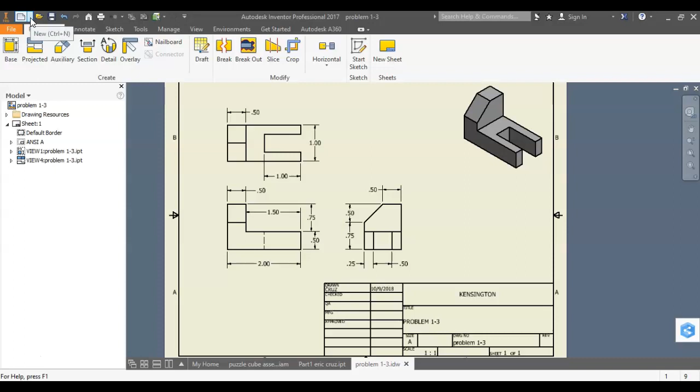What problem are we making? 1-3, that's the hardest one. Does everyone have Autodesk open? We're about to tell you what to do. Start a new part.

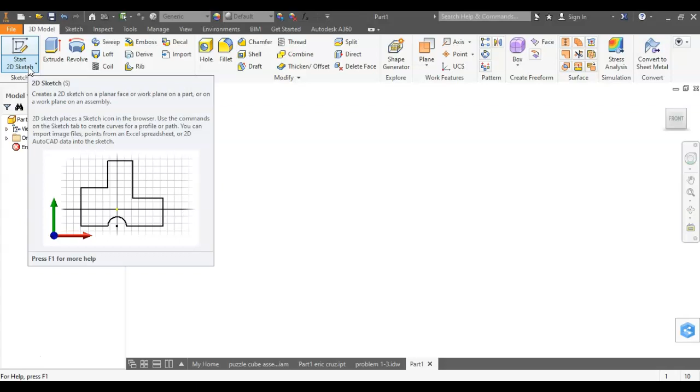For those of you watching online right now, we're based out of Philadelphia, and you might hear the word jawn often throughout the video.

Does everyone have the part open, ready to draw? Start a sketch. Select XZ. What's the size you guys have been noticing? 2:1, and what's the extrusion? 1.25. So I'm drawing a rectangle that is 2 by 1.

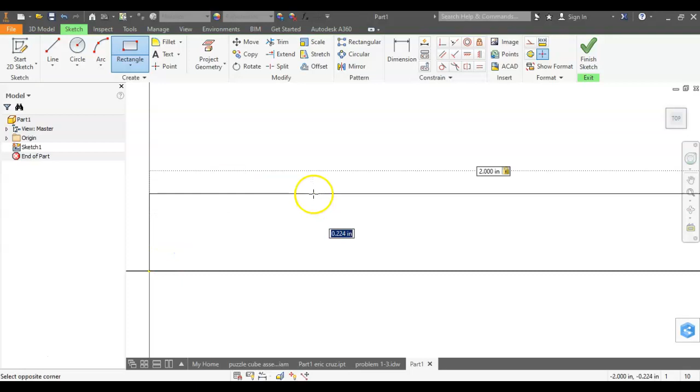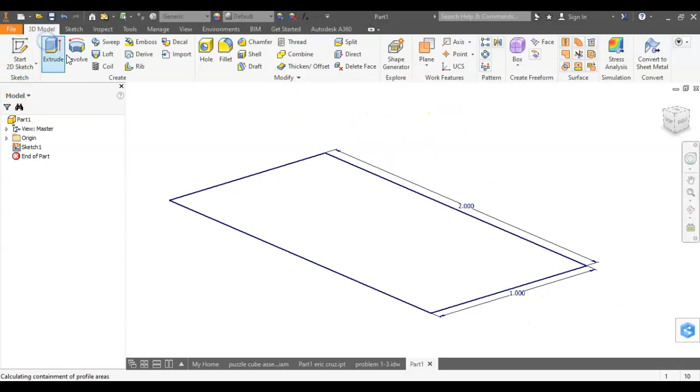I'll wait a moment for you guys to finish that. You got it? Finish sketch. Extrude by what? 1.25. Alright, let's go back to our drawing.

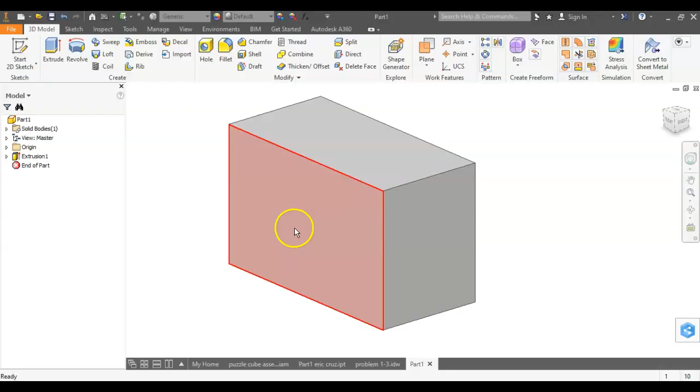What would you guys do next? You would cut a chunk out of it. Which chunk would you cut out? On that side, this right here? So right click, new sketch.

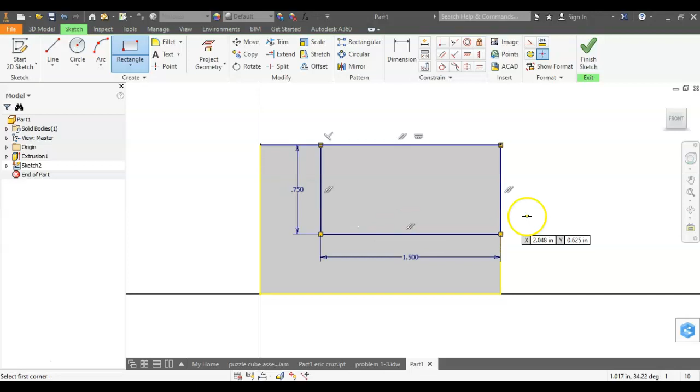Project geometry. Select the rectangle tool. We're going to go 1.5 by 0.75. Can you see that? Got it.

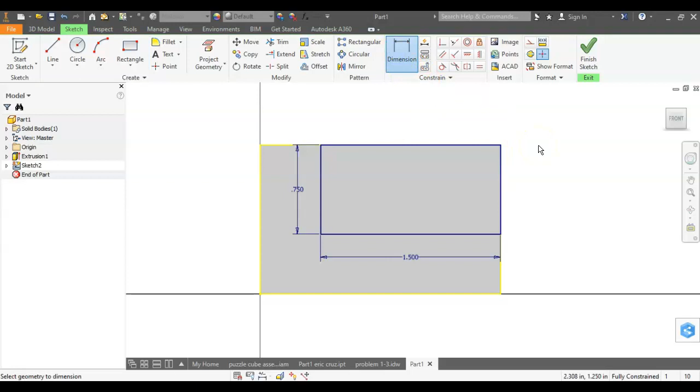What's next? What's that called? What do we call that? Are we done with this dimension? Are we done here? No. What do we do next? We click on dimensions, and then click on where it says 1.5, that line. We already have a dimension though.

So we're done. The distance between the wall and... I'm pressing finish the sketch. Yeah, it's already good. Finish sketch.

Alright, let's wait a moment so everyone can catch up. Ask them how's their day. How's your day? Oh, people watching, how's your day? Comment, make a video comment and let us know how you're doing.

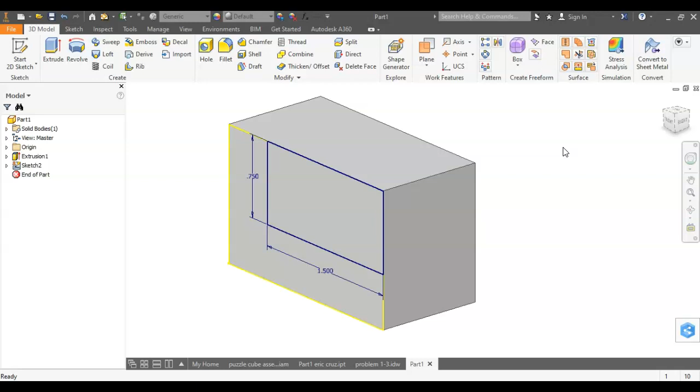Extrude, cut all. Extrude, cut all. Hey, B-Ride in the back, do the top view first. What do you want to cut out next? This thing? Yeah, okay, what are the dimensions for that?

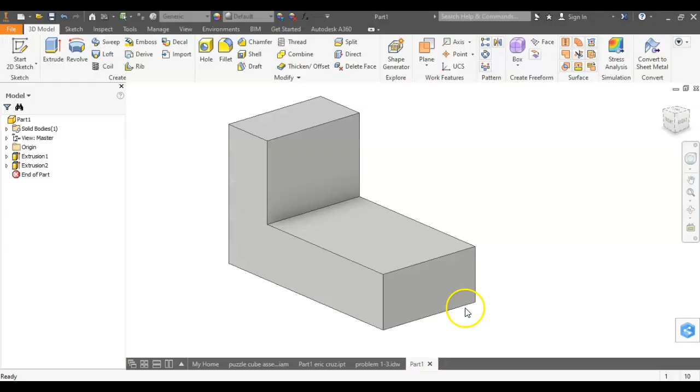1 and 1, 1 and 0.5. So on this right here, everybody see that? Yeah, you sketch there. Alright, I drew the rectangle first, I'm going to dimension second.

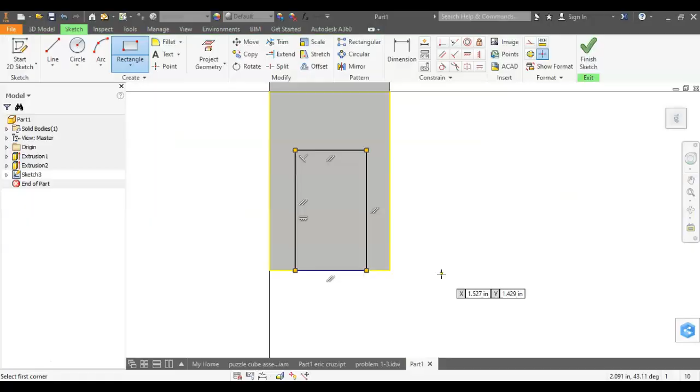The drawing says that these little legs are 0.25 away from the edges. So that's 0.25 here, that's 0.25 here. Which should make that 0.5. We don't need that dimension, but we do need this dimension, which is 1.

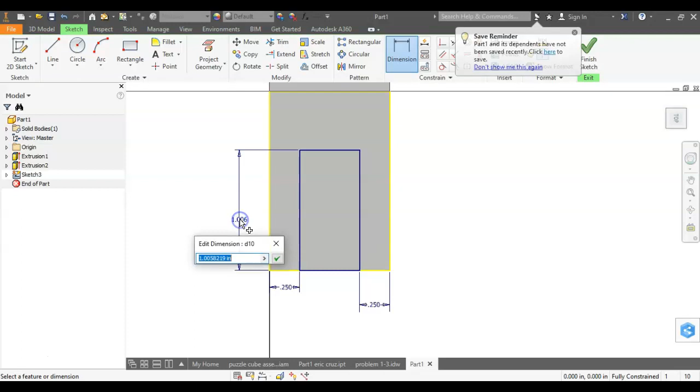Do that again. You all done? That's beautiful, good job. Oh, which one's that one? This is problem 1-3. I did that one, you see that?

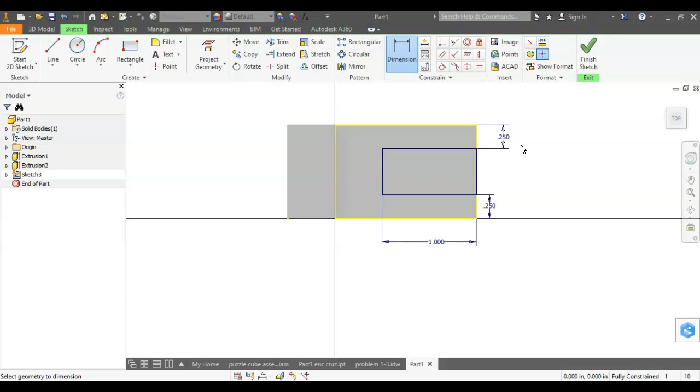Got it. The 1, I click dimension here to here. Oh, wow, did it wrong.

Can I go to the screen? Yeah, fill out a pass, or take one of the passes over there.

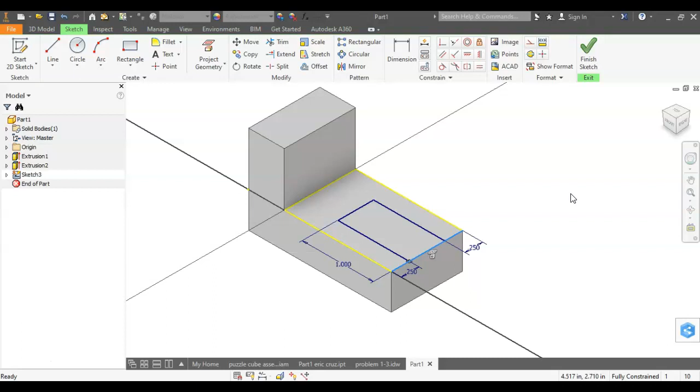Good job on your drawing. Alright, extrude cut, so finish.

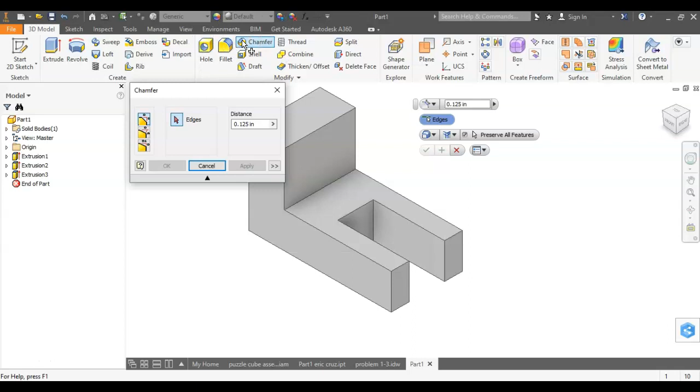Yeah, the chamfer. We could either draw a triangle or use the chamfer command. So if you click on chamfer, you see that? Chamfer, and type 0.5. And you click on the corner. See that?

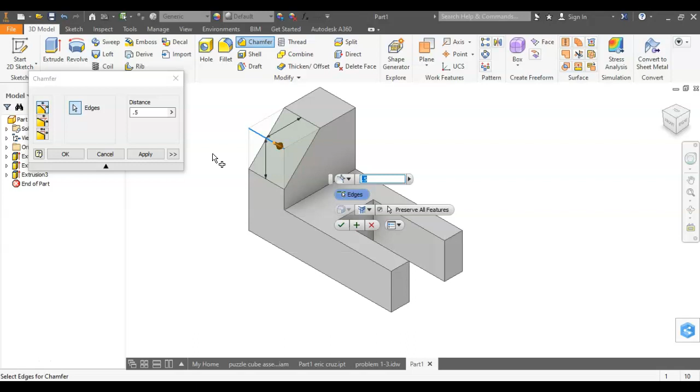We could have been doing this. So the point of this video lesson was to teach you which tool. That's the one you knew we could have did. What's the name of the tool? The Chamfer, not champler, chamfer.

Are we done with making the 3D model? Yeah. Alright, what's next? The drawing. Start a new drawing.

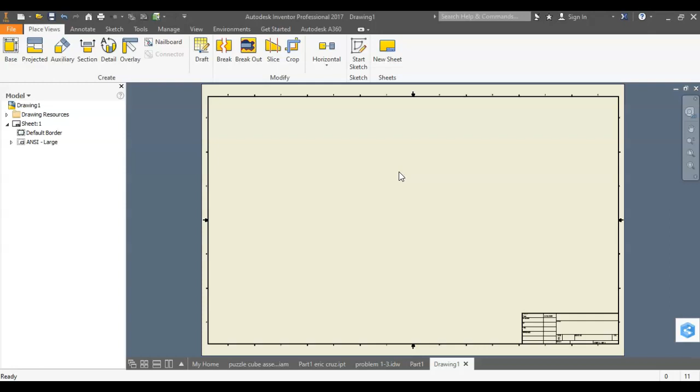What do we do to the drawing, kiddos? What size is it? A. What do we do to the title block? ANSI A, good. What's next?

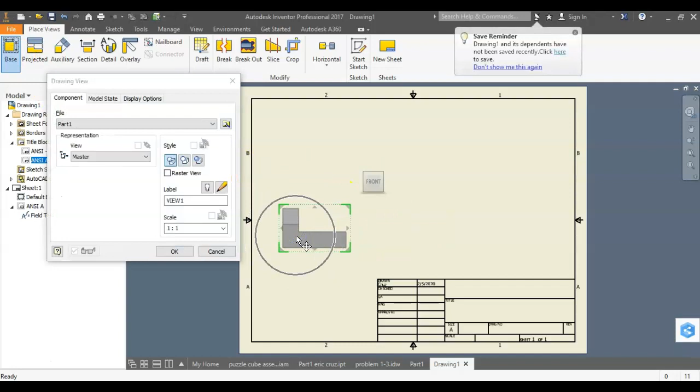What do we call that? Base, what's the name of this view? Good, and the view? And? Very good.

Oh, problem 1-4 example. Annotate dimension.

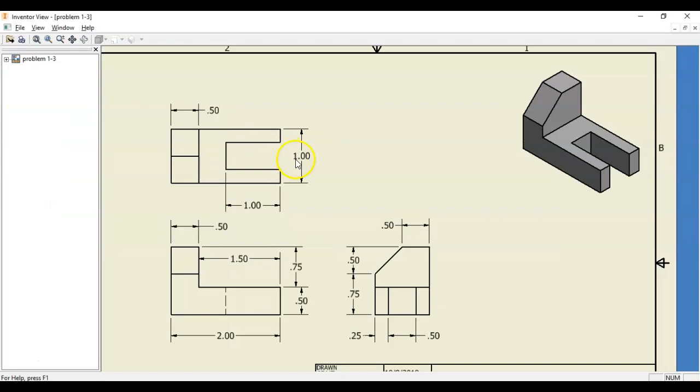Oh crap, it is 1-3. So, file, save as. It's 1-3, guys. Save, save.

If you don't know, I'm still going through puberty. I'm actually 12 years old. I have my degree and I'm working on my master's. Basically, what's that one TV show? Never mind.

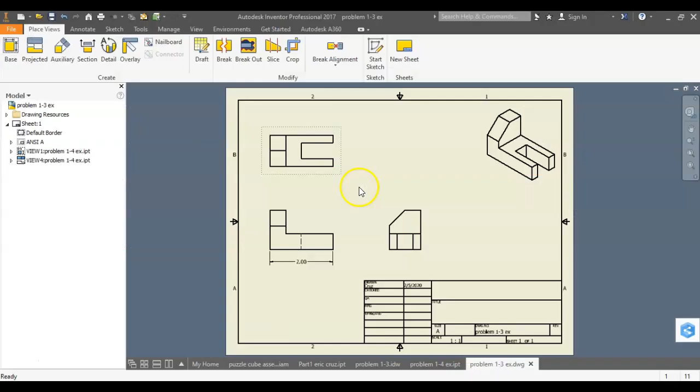He's a doctor, yeah, you know what I'm talking about? You see this edit dimension window that pops up all the time? I just uncheck this because it kind of gets annoying. Doogie Howser, yes.

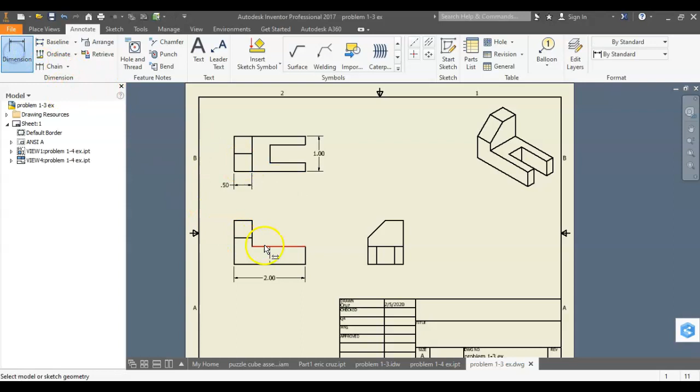Mm-mm-mm. Alright, there it is, guys.

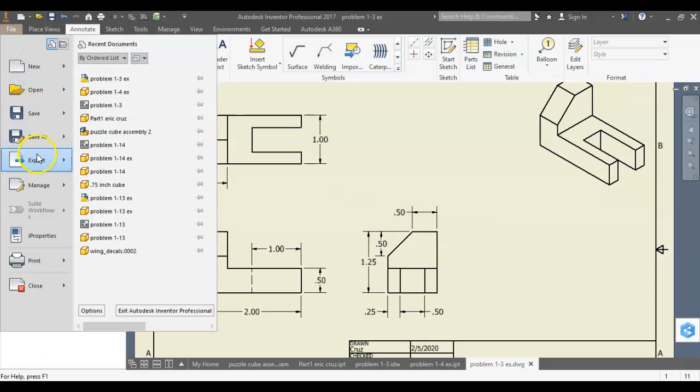So save that, we're going to export it as a PDF. So I'm going to press Control S first, and then go to File, Export, PDF. Save, and it might automatically open it up in the PDF viewer. Then either print that out if you're connected to the printer, but always, always, always submit your work on the Google Classroom.

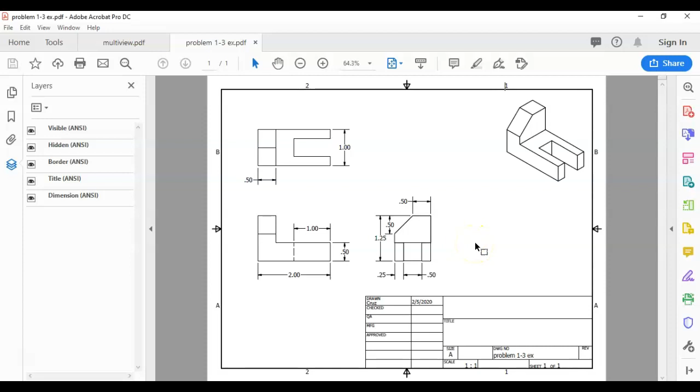Oh, I forgot to update iProperties. Whoops. Right click on that, iProperties. I'm nervous.

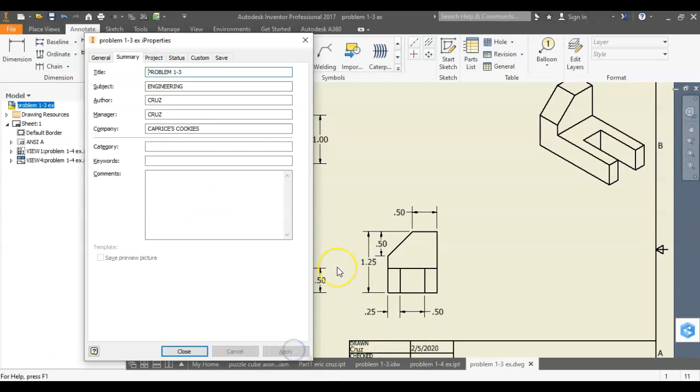Problem 1-3. Engineering, I'm the author, I'm the manager. We're at KHS, or you can make up your own company name. Caprice's Cookies. Apply. Close. See that? Okay, alright, goodbye.